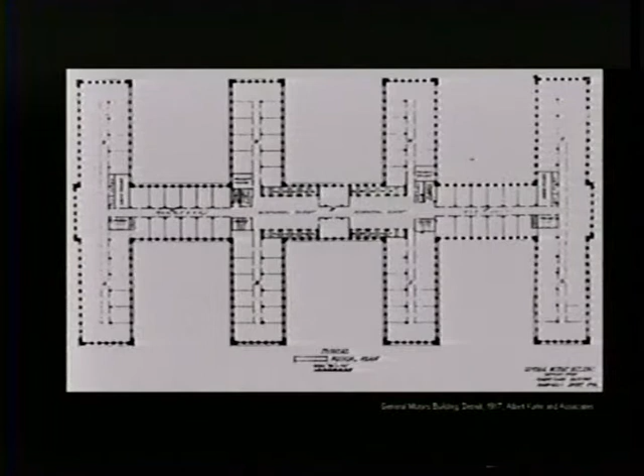You'll notice that there's also a relationship between the distance of these bars that has to be maintained, lest the daylight distribution in the lower parts of this building section be interrupted and those spaces not be functional. And then in the deep section, this is a plan of the ground floor. We know that this is deep, and the challenge with a deep floor plate like this is you can't bring in light from the perimeter to effectively illuminate that space.

So in that space between the office bars, what do we have? We have a set of skylights that essentially illuminate the back of this showroom to supplement the light from the perimeter. It's not rocket science, but it's a very thoughtful integration of building form and light.

And secondarily, these skylights, by illuminating the back of this section, allow for a nice transparency through this. Otherwise, you'd be in a very bright exterior looking into a very dark interior, and that window would have been reflective. But with the addition of the skylights, you can see those products highlighted in that space beyond you. So this is very functionally about lighting design and the way you experience space.

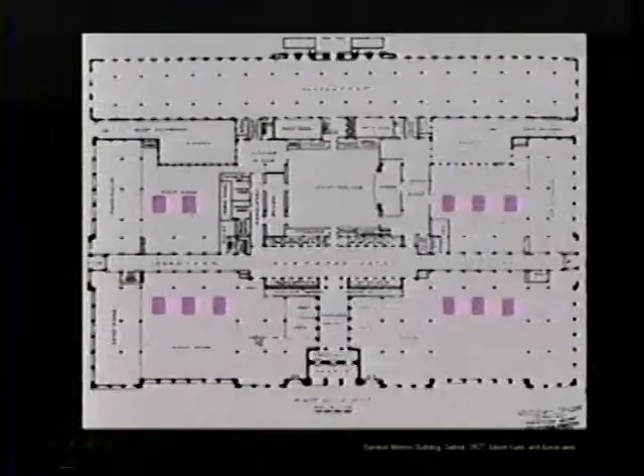Secondly, the way that this building was programmed looked at the relationship between the needs of each one of these program elements and the distribution of daylight into the space. The offices are important, the showroom is important, these shops are important. But this entry lobby and elevator area, not so important, because what the architect wants you to do is enter this space and have your eyes adjust to low interior light levels. And then when you get to your destination, it feels bright, rather than going into a space that's immediately darker than what you exited.

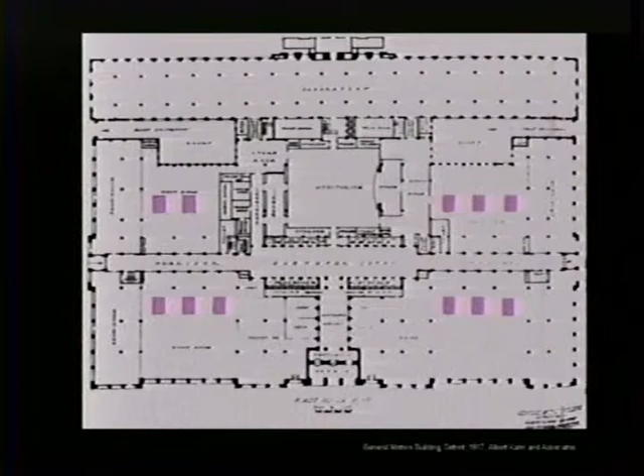And ultimately, the auditorium, which is probably the space that needs the highest level of luminous control, because they're using spotlights, doing theatrical stuff, is buried in the center of the building. They don't want daylight in there. It's not going to fit with their programmatic needs. So this is a simple building, but it's very elegant and thoughtful in terms of the way that it addresses light. And this was basic competence for architects up until about 1945-50. And it was so key that architects really took this stuff seriously.

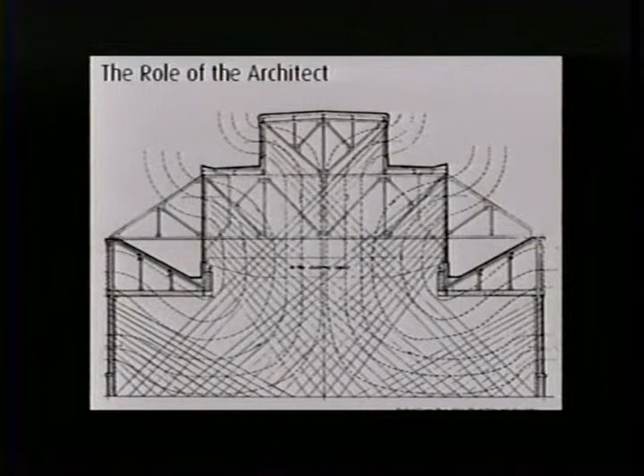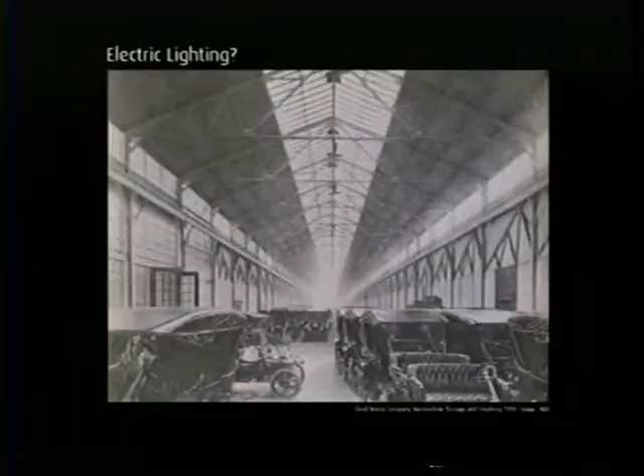This is a finishing shop, so they wanted to be able to see the light modeled around these vehicles on all sides so that they could effectively do their work. And not only did it have to function on its own, it had to function across a really broad cross-section of the day. Because if there wasn't enough light in here, these guys couldn't work, their product would be substandard, and it was really, really taken seriously.

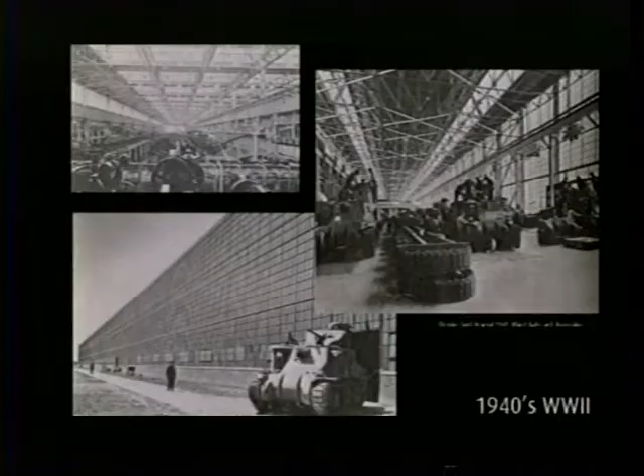And what really happened was that the relationship between how architects designed their spaces really lost connection with light in space. And that work became the purview of lighting designers and engineers. And those things sort of went their separate ways. And I think only now they're starting to work their way back through integrated design, kind of like the things that are being promoted here in Kevin's lab.

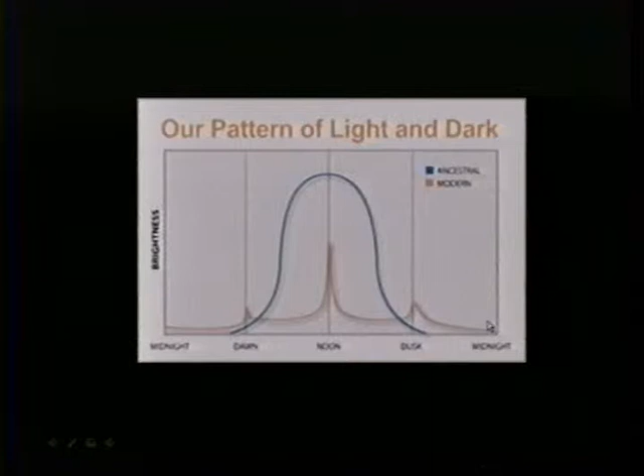And we might get up, head out to the car or the bus stop, catch the bus, drive into work, get a little dose, and then we sit at about 50 foot candles in our offices, or 30 or whatever it is. And then ramp up for our little trip to lunch, back in the office, 30 foot candles, and then back home to our sort of low light level interior environments. And that's very, very different than what we were built for.

And not only do we sort of not get the brightness, we don't really get the darkness either. We have the ability to illuminate everything all the time, and we sort of do that for a lot of reasons. But anybody who's flown into a city at night just knows it doesn't seem right to light everything, especially when no one's there. But we do it anyway.

We also know that Americans spend 90% of their time indoors and tend to work more hours than any other industrial nation. And that light regulates our brain chemistry, serotonin, melatonin, based on not just exposure to light, but just seeing brightness. Seeing that brightness tells our brain it's time to wake up. And as architects, it's key that we address that.

The circadian rhythm is sort of how our body responds to the 24-hour cycle of lightness and darkness. And also the color spectrum, sort of the dynamic chromaticity of the sky, or the way it changes color, the way it's blue during the day and much warmer in the evening. And the disruption of that cycle can lead to all kinds of problems. Seasonal affective disorder, breast cancer, Alzheimer's.

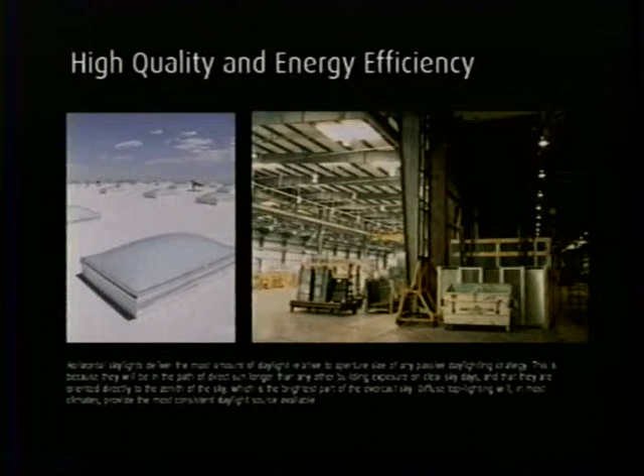The other thing we know is that by design, architecture creates pollution through using lots and lots of energy. And daylight can help reduce energy usage in buildings if it's done right. But it also has another quality that I think is nice compared to a lot of other types of energy efficiency strategies. Not only does it have the potential for creating a more energy efficient built environment, but it can do that at the same time you actually deliver a much higher quality space. I think that's unique in daylighting. But in some ways, it's sort of like trying to have our cake and eat it too.

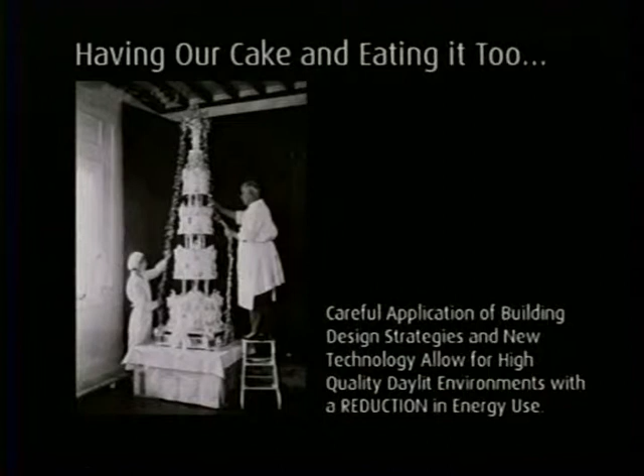Though with the new technology we have in windows, in envelope design, in blinds and shades and exterior sun control, we can deliver daylit environments that are actually more energy efficient than buildings that are not well daylit. So how do we do that? Well, it's through sort of a simple line of thinking around creating small loads in buildings. And step one, in my opinion, I'm the daylighting guy, so I'm going to say this, of course, is to use daylight as the primary source of illumination in buildings whenever you can. And that's for most buildings. Optimizing the building orientation, shading the building skin. Don't overglaze.

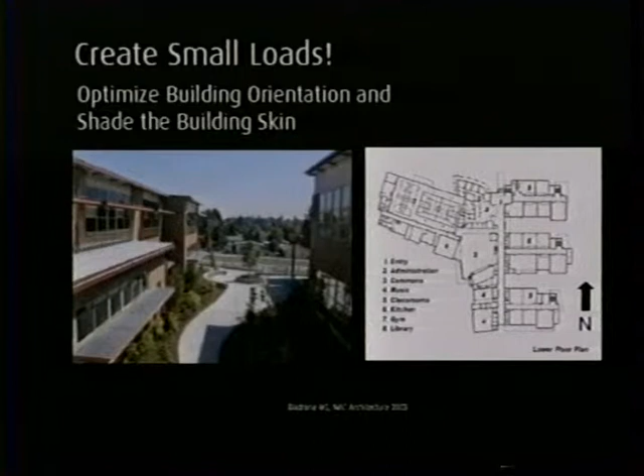So how do we do that? Well, we need to understand what our source is. If we're going to design a building that responds to the sky as a light source, we need to understand what that light source is. And to make it simple, since the sky is so dynamic, changes color, the sun's in a different place, the weather changes, sites are different, we break it up into two simple categories. One is the overcast sky and one is the direct sun.

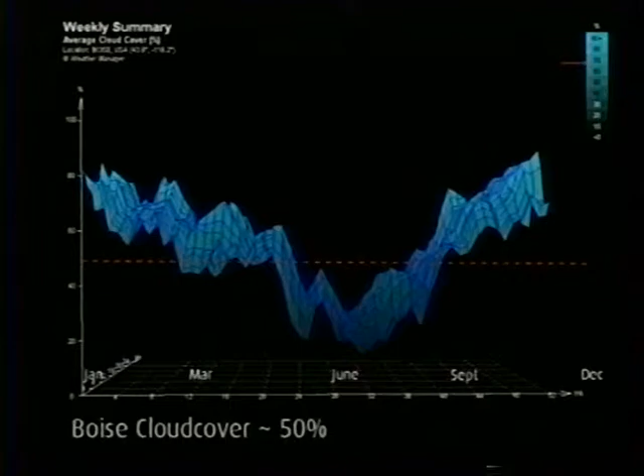Logically? In climates where it's the opposite, those are ideal passive solar climates, where it's overcast in the summer due to thunderstorms or some other reason, and it's really sunny in the winter, so you can take advantage of that thermal load. Anyway, in Boise, you have an ideal climate for daylighting, and a much brighter resource than we do here in Seattle. So how do you daylight? Pardon? Oh, I thought there was a question.

And as it's been in the past, it shall be in the future. The sky hasn't changed much. A thin building plan where you're out at the perimeter gives you access to daylight as a resource from the side. And then if you've got a big and deep building, bring in light from above. It's not rocket science.

Daylighting in the direct sun, however, kind of is. It's really hard. It's complex. We've got essentially a point source, the sun. And not only do we have a very harsh point source, you can see in direct sun we have 15,000 foot candles. Out here you probably have closer to 20 in the summer. In shadow, that can be as low as 500. So the blue sky is actually really quite dark as a light resource.

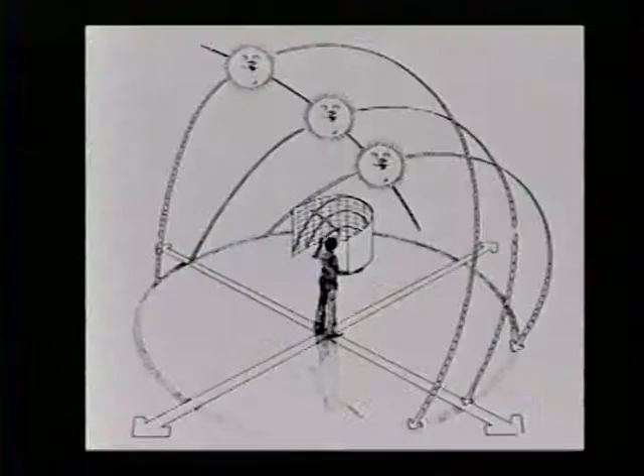So how do we deal with that level of dynamism with something like a building, which is generally a fixed object? Well, it's tough. And the way we start to do that is to look for patterns in the sun's position in the sky. Does this diagram make sense to everybody? I'm sure you guys have all seen these thousands of times.

Tell me to pick up the pace if I'm getting boring.

But what we see is we've got this low angle sun in the east, we've got this low angle sun in the west, we've got almost no sun in the north, and then the sun is in a pretty static position in the sky on the south side. So what we know is that east and west are difficult every day. North is really not that difficult, but we've got low illumination levels because we don't have a lot of sun there. And south is something fairly controllable, though we might have some seasonal problems with low angle sun based on your latitude.

Look at this diagram this guy's holding here. I'm going to jump forward. See if I can get this to work. The other thing is, we can look at diagrams all day and figure out this is the sun, this is what it's doing. Let's keep our fingers crossed for technical effectiveness.

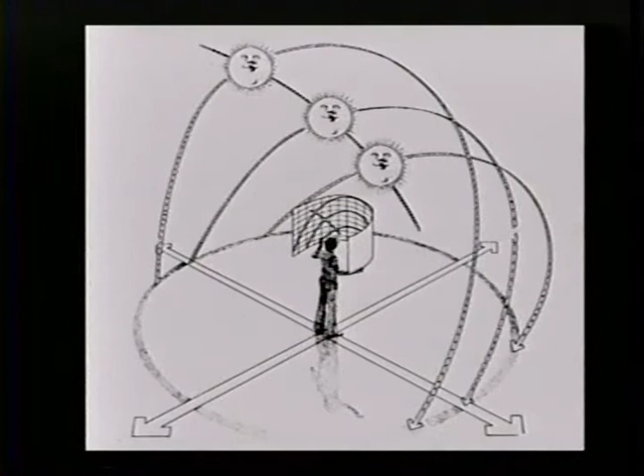And a lot of times when they get conflated together, it results in buildings that don't perform very well because people don't take into account the fact that during all occupied hours you need to control glare, whereas only during seasonal overheating do you need to control direct sunlight for thermal.

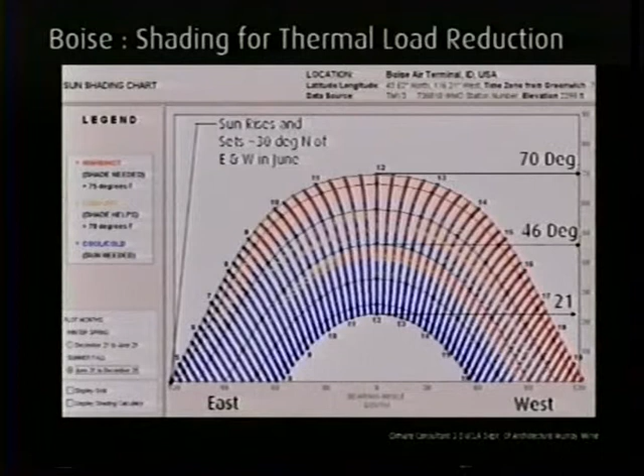That seems to be something that doesn't succeed frequently in buildings that I've been involved in. You know, whenever you talk about daylighting in the direct sun, I always reach for Aalto. It's easy. He's a master. It's just there for the taking.

And I always like to remind people through that video that trying to daylight, trying to provide a functional diffuse illumination with direct sun is like trying to drink from a fire hose. It's not easy because the sun is so intense. But Aalto does a really good job of finding a way to take direct sunlight and turn it into something that we can use as a functional interior illumination source. And he does that by designing the building as a light fixture.

The first thing he does is he stretches out his building long in the east-west direction because we know we've got that low-angle sun first thing in the morning, low-angle sun in the afternoon. And by making his building long and thin, it makes it shallow, it makes it exposed to the north where we don't have glare problems, and exposed to the south where we can control that sunlight.

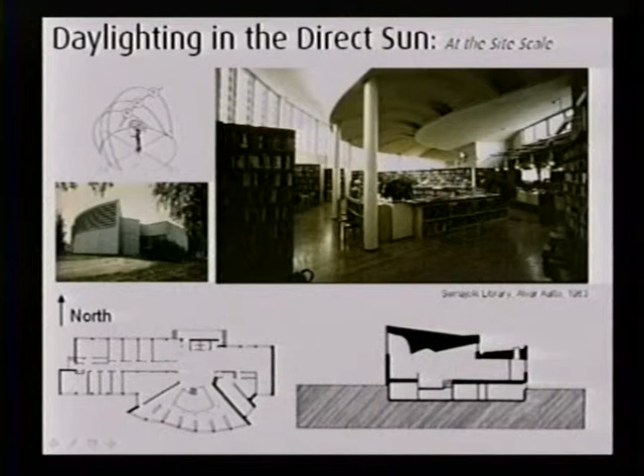And if that happens, and this space is quite dark, and we've got daylight level illumination out here, the rest of the space is going to feel very dark, and it's going to feel contrasty. So what Aalto does is he sort of punches a little hole on the north side to bring in balancing illumination. And not only does he do that, he directly engages it with this surface here, which is deliberately shaped to sort of accept that light and provide a surface for it to be revealed on.

And the relationship between these apertures and the surfaces is extremely sophisticated, so that the distribution of light is always balanced, always sort of connected with the task and the way that people perceive this space. So that's all I have to say about direct sunlight. All I have to do is go to Aalto and it's sort of done.

We've got a real big problem in terms of designing for daylight. We've spent the last 85 years with our lighting criteria being essentially only concerned with electric lighting. And there's books and books and books of reference manuals that tell us how to do that. What do we have for daylighting? Well, we have one 3-page leaflet in the LEED handbook. Certainly there's textbooks out there, but in terms of widely recognized performance metrics, all we have is that.

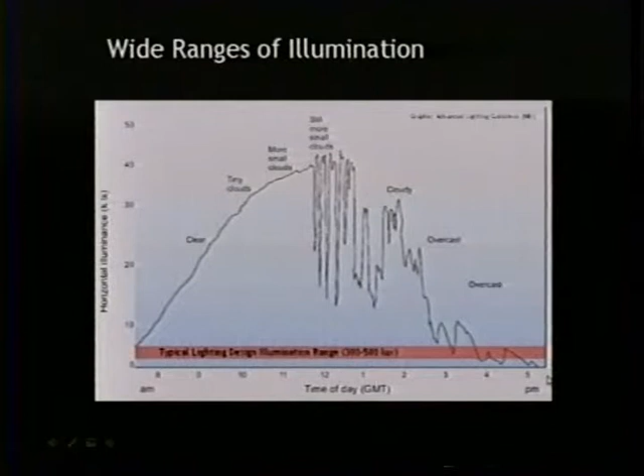And it's tough because all of those lighting metrics are designed around a static lighting condition, generally between 30 and 50 foot candles, or 300 and 500 lux. But our daylighting resource is extremely dynamic. You know, it's all over the place, really high, really low. So how do we deal with that? Well, it's tough. It's not easy. I don't have any answers, so there you have it. We're working on it. But what's very clear is that what we've got for criteria now is not adequate.

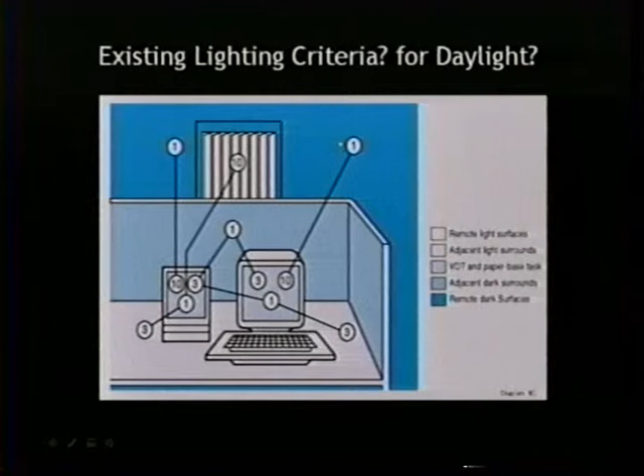We see that based on the IES, or the Illuminating Engineering Society's recommendations for visual comfort, we've got a maximum 1:10 contrast ratio in this workstation. But here's my workstation, and my space has a window. This is my old desk. This was on an overcast sky day in Seattle, and you'll have to take my word for it that it was entirely comfortable. It was just fine.

This is measured in candela per meter squared, or surface brightness. And you see 50 candela per meter squared at my desk, almost 20 down here. You know, this task lamp is a little bright. Outside in the sky, this is on the overcast sky, we have about 3,500. And that's a contrast ratio of 180 to 1. And anywhere you have windows, you're going to see contrast ratios in that range.

It's just a fact of life, and it's something we've ignored, so we don't really know what the actual threshold is for visual comfort. And my guess, I'm just guessing here, is that there aren't any absolute numbers associated with visual comfort. It's going to be context-based. So when we look at LEED as a metric, it's our primary design metric these days.

Its goal is to essentially provide building occupants a connection between the indoor spaces and the outdoors through the introduction of daylight and views in the regularly occupied spaces of the building. I think that's a really laudable goal. It's a good idea, and it's rightly placed in the indoor environmental quality portion of LEED, because that is, I think, the most important reason for using daylight, not energy. And frankly, if you get the daylighting right, your energy credits will accrue based on that performance. But the ways that it asks us to comply with their credit are frankly lacking.

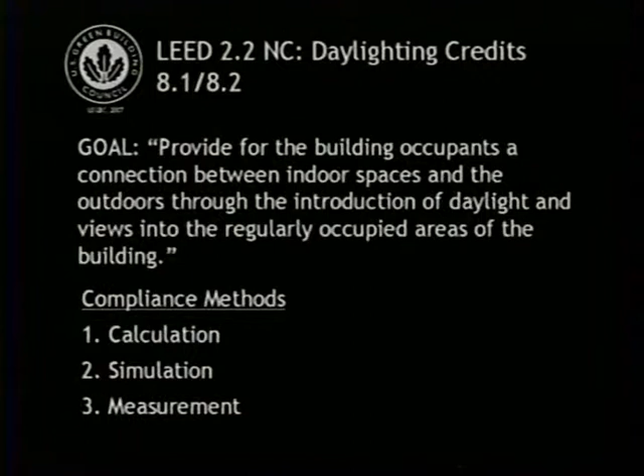We've got the calculation method, which, has anybody done LEED compliance for daylighting before? So everybody has probably done this one. This is the one I recommend people to do because it's the easiest, especially if you're already doing a reasonable analysis. And this is just a simple window to wall ratio that tells you when you've achieved a reasonable window to wall ratio for daylight performance.

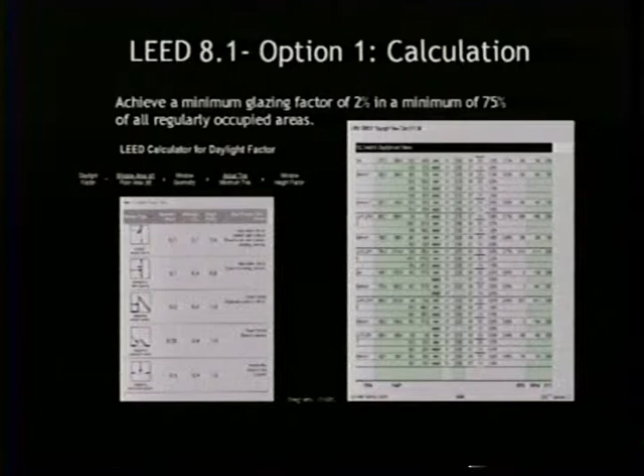The challenge with that is that the window to wall ratio that achieves a good quality daylit space according to this option is the same in Nome as it is in Miami or Arizona or New York or here. And we know that those climates really require different architectural strategies. So it attempts to be a one-size-fits-all. It's based on the overcast sky, so it doesn't make a lot of sense.

The second option is to do a simulation at noon on a sunny day and achieve more than 25 foot candles on a horizontal surface. But I find that a little problematic too, because one, what's magic about 25 foot candles? And two, what if you have 10,000 foot candles? You comply with the credit. It's just fine.

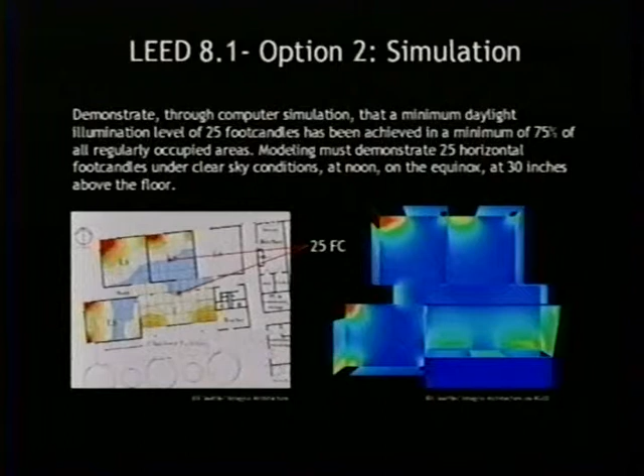And what if you're just sort of on the edge on the east and west? We know there's not a lot of illumination on the east and west at noon on the equinox because the sun is directly out of the south and you're going to be in shadow. So maybe do you bump those up unnecessarily to the detriment of the project to meet the credit? I would hope not. I certainly would hope the credit wouldn't drive anyone to do that, but stranger things have happened.

The third one, I like the intent of it. I think it's really important. It says after you build a building you go out and measure and see how it's performing. So it tells you you can go out and on a 10-foot grid, measure all your regularly occupied spaces and achieve 25 foot candles. So to me, it's sort of the wing and a prayer method. But it doesn't say anything about the time of day you go out there, or the time of year, or any of that.

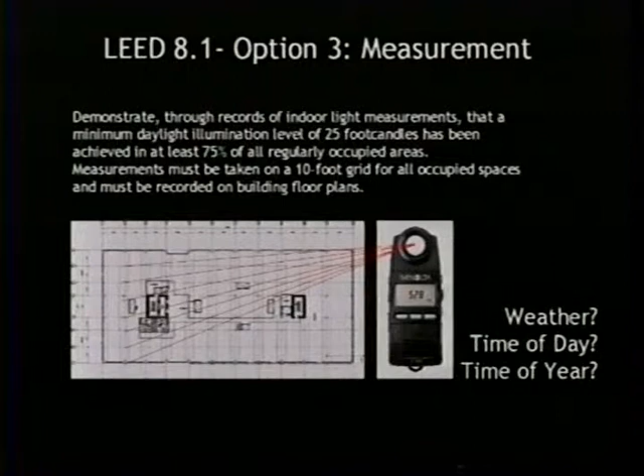So if you have a building that you're not entirely confident is going to perform per the credit, what I would do is get your light meter and pack a lunch and find a sunny day in the winter and go out and start with the east side. And you'll get your 25 foot candles pretty much everywhere. And then around noon, maybe make your way over to the south. And then late in the day, move around to the west side and sort of follow that illumination. I bet you can get there. Again, there's no distinction for what's too much, what's too little.

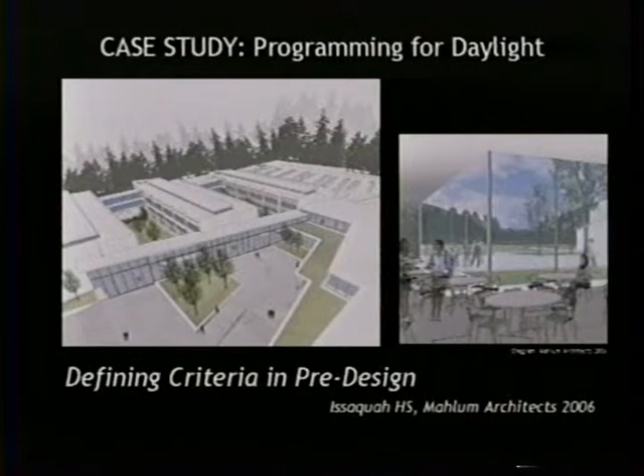But the one thing that I like most about the LEED credit, and I think this is probably its most important function, is it forces you as a designer to sit down with the brief and decide what spaces are important for critical visual tasks and where daylight is important. And in my experience, the most effective projects have been the ones where, prior to organizing the building on the site, lighting and daylighting and energy were part of the building program and had an influence on the building organization.

And I think it's important for all of you, when you're designing a building brand new, to go through and look. If you want the daylighting to be good, go space by space and identify, are views important? Is daylight even important in these spaces? How often is it occupied? And what time of day and what time of year is it going to be occupied?

And for those spaces that are going to be daylit, ask these questions. What are the minimum requirements? Is glare control important? Are there maximum light requirements? What might be a good solar orientation based on the time of occupancy? And what daylighting strategies in particular might be most appropriate?

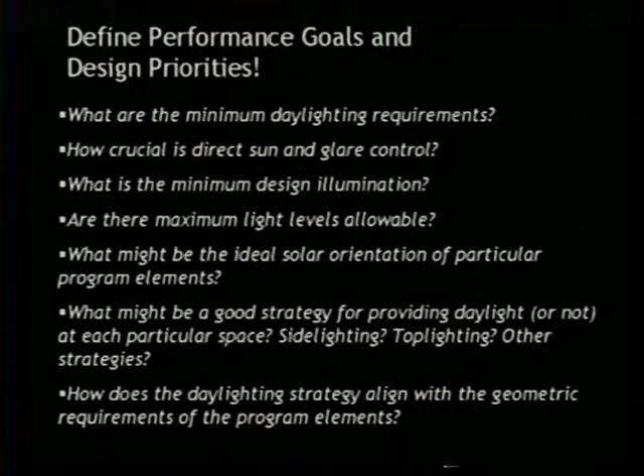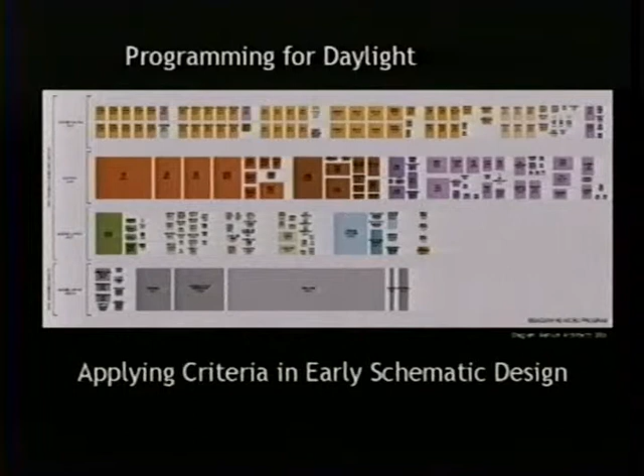And I like doing that in conjunction with a program like this that starts to show a little bit about what the aspect ratio and sectional geometry of the spaces are going to be. Because rather than just knowing gross square footage numbers, here you start to know a little bit about what the geometry of these spaces is and how the daylight might effectively be delivered.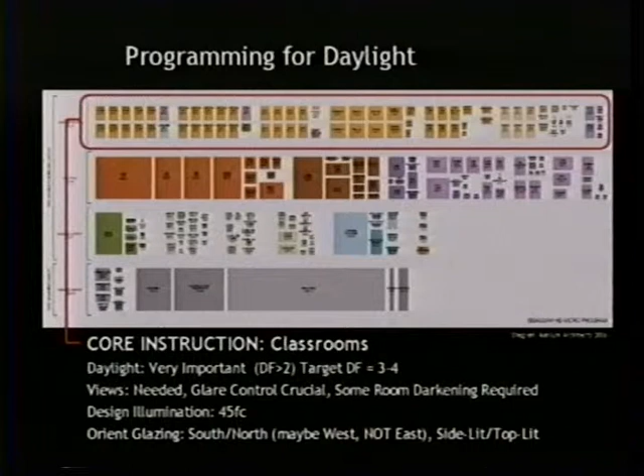In this case, and this is a very simplified version of what we did, we looked at, say, the classrooms, and we know that these are sort of 30 by 30 spaces, and that generally, if they're deeper than 24 feet, we can't really effectively light them from one side. We have to light them from two sides. We also know that glare control and views are really important because of research that tells us that views are important in classrooms and because of what we know about glare and direct sunlight.

The other thing we know is that schools operate from about 7 in the morning till about 2 in the afternoon, maybe 2:30, maybe 3 at the latest. So an east-facing classroom is going to be subject to very low-angle sunlight every day, first thing, and the teachers are going to close the blinds and they're going to stay down forever.

But we also know that the west side maybe isn't that big of a deal because we can shade it and probably control direct sun easily until 3 o'clock. And if there's glare and maybe a little overheating, is it really a big deal if no one's there to experience it? So there are opportunities for site planning this thing.

We know that the classrooms need to sort of be north, south, or maybe west, but certainly not east. And that it would be nice if they're not shallow, that they're also on the top floor. The gym is sort of a different story. It's lit from above. We know that we can't really effectively light a gym from the side without overglazing the heck out of it and making it subject to lots and lots of direct sun that's going to be glary.

So ideally, that gym really wants to be directly under a roof so that we can light it diffusely from overhead. And in reality, my experience shows that having windows or substantial amounts of window area just leads to lots of glare, and that most gyms with windows have the blinds pulled all the time. And that opens some opportunities.

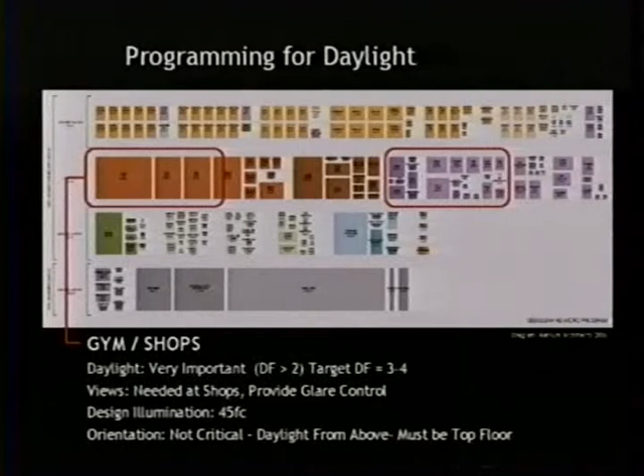Yeah, it needs to be on the top floor, but in our worst case scenario, if we don't have a lot of windows, we can orient this thing east, west. We can put it in our worst location for sun angles because we're not going to be using glazing on the side. So the orientation of that thing really doesn't matter as long as it's got access to the roof. And the same could be said for some of these shops. They're getting big enough that we can't really effectively light them from the side.

The theater, just like that historic example that I showed in the beginning, we don't want daylight in there. And setting priorities and identifying where daylight isn't important is just as illuminating and helpful in basic building planning as knowing where we want it, because it allows us to have priorities. Because if everything's a priority, you all know nothing is a priority.

And then our circulation. It's not a critical visual task area, but sure, it'd be nice to have daylight in the space. So what we know is, let's orient it any direction we really want. Put some glass in there, make it nice, but we don't have to care if it's west facing or east facing. A little sun in there will animate it. It'll be cool. It'll be dynamic. And you know, you don't need a lot of glare control. So those can sort of fit in anywhere.

And that exercise, even as simple as this, has been the difference in my experience between projects that are an easy coast downhill to success and an uphill, painful slog to mediocrity. It's just been my experience. So how do we deliver daylight? Well, predominantly through two design strategies, top lighting and side lighting.

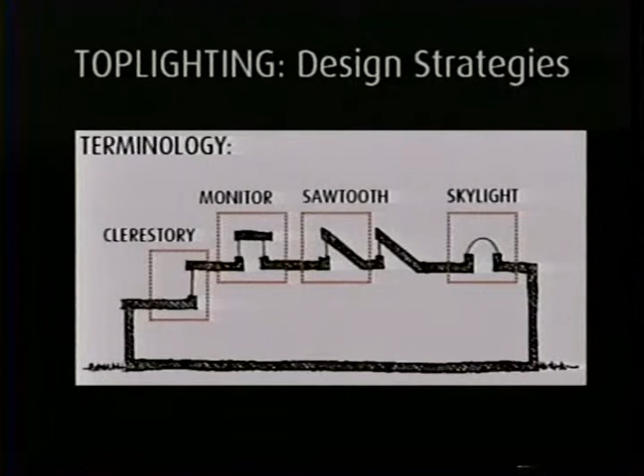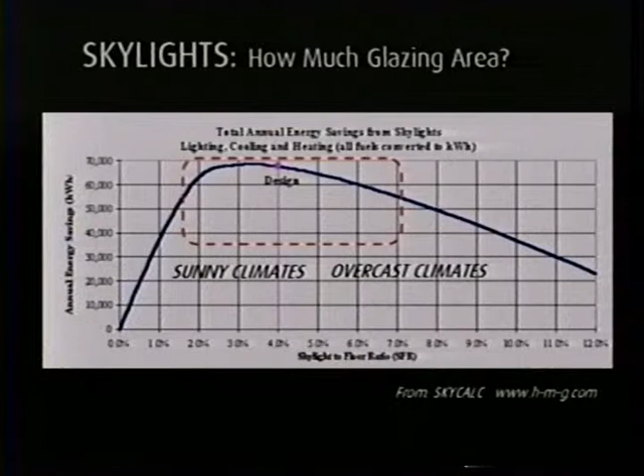And top lighting, just like the overcast sky, it's easy. Skylights, high interior reflectances, bounce that light around. How do we know how much? Well, there's tools online like SkyCalc. There's sort of local lore that you guys probably know of how to do skylighting. It's very, very simple.

The only design guidance that I have is generally I like the skylight spacing to be roughly equivalent to the floor to ceiling height, and I like about half that distance at the perimeter, because I know that if you light the walls, light the architecture, you get the perception of brightness. If you light the floor, you don't. So you like to get that light on the vertical surfaces.

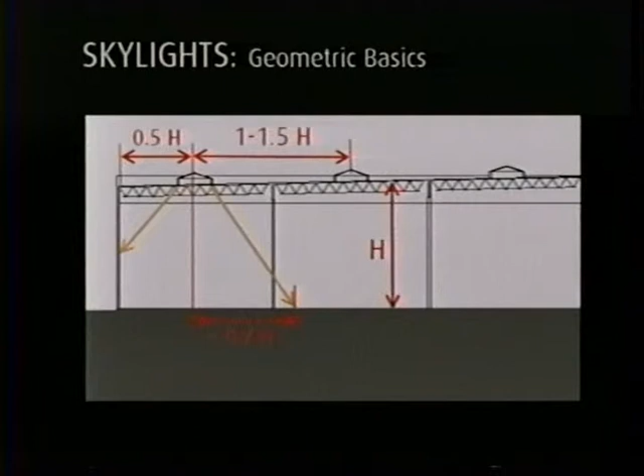The other thing that is absolutely key is maintaining effective light diffusion. This is for a project I did for Boeing. The bottom of the truss is 100 feet here. This is enormous. So here we've got direct sun just tracking through this thing. Looks like Studio 54 in there. 6, 7,

8, 9. And though it's dramatic, and though it's kind of cool to look at, it doesn't fit the visual tasks that are happening in here. So yeah, it's cool, but the light's all over the place. The distribution changes. We got line of sight to the disk of the sun, and we've got glare. They've also got offices built in this giant truss. These are each a one-story office in here. And this skylight sort of drives direct sun and glare into those offices.

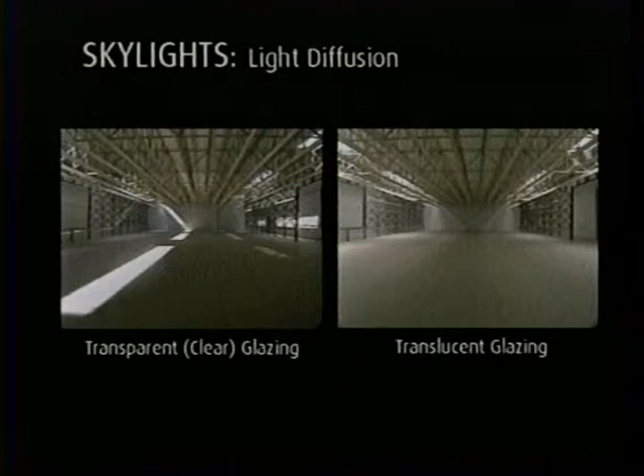Well, through just changing the materiality of that skylight to something light diffusing, we get an entirely different pattern of light distribution in the space. The only difference here is diffusion. And it sort of ramps up, gives us a good distribution, and ramps back down. So it adds some dynamism, it gives some better color rendering, and it provides the kind of light diffusion that we need for putting wires together and riveting together aircraft.

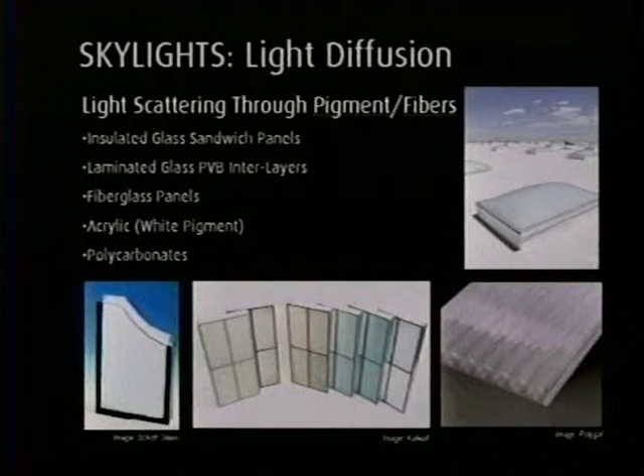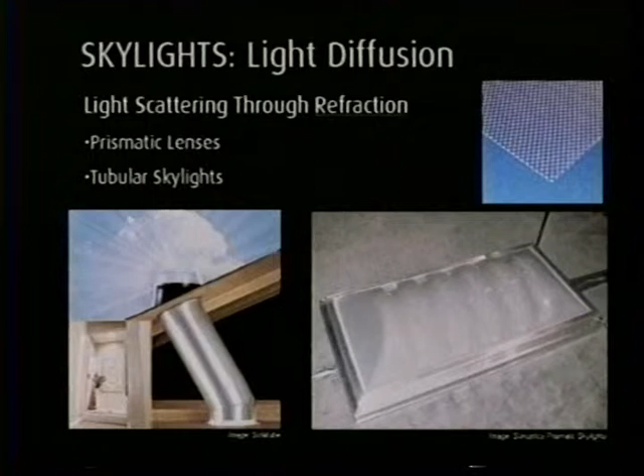So how do we get that? We all know this stuff through pigment, fibers, scattering, Kalwall, etc., acrylics. We can also get diffusion through refraction, the prismatics. I'm not going to go into the physics of light here. And then through reflection, just bringing direct sun onto surfaces and allowing that to diffuse through the space.

I have until 6, right? Is that right? Do you guys need a break? You guys want to take a break? Questions, comments? Okay.

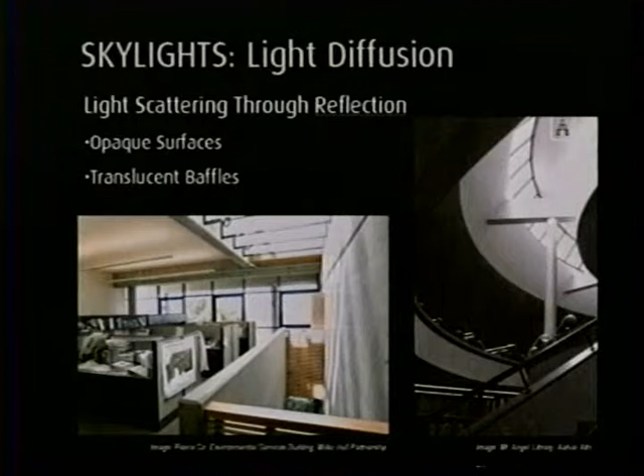Side lighting is really a much more dramatic challenge. It's sort of stuck with these immutable laws that you just never can get beyond. And that is that you generally get a distribution about twice the head height of the window. And that holds fast. And as soon as you get anything that vertically projects into the space, you get deep shadowing. And that's a challenge when you're trying to fit out a space.

And the other thing is that this is sort of the best case scenario potential. When the users come in and start changing the blinds, adjusting the glare, and putting their stuff in there, that's a whole different story. So it's very unpredictable. When you're lighting from above and you've got diffuse skylights, that happens independent of people's interaction. Side lighting, you need to either be clairvoyant to your user activity, or you've got to plan for your worst case scenario contingency.

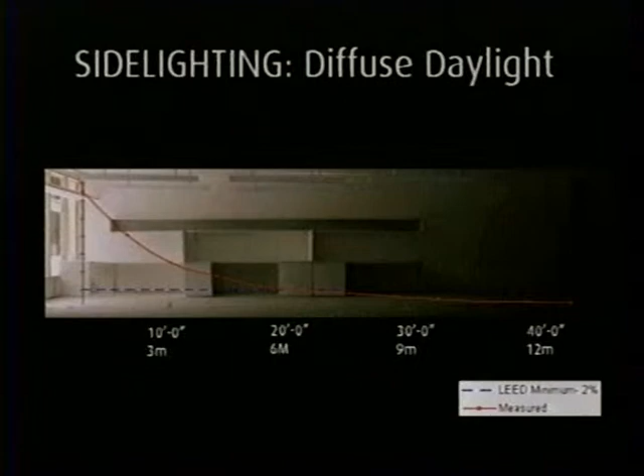And really to have effective side lighting in spaces that are this deep, essentially beyond 25 or 30 feet, you really need a secondary source. It's just immutable law of physics. It's unforgiving. And I made this 40 feet because of something that I'm sure you all are aware of. When you're working with developers, what's the magic number of that lease span? Sort of 40 feet. Everybody needs to hit that because that's the economics. It's tough. I don't have easy answers.

One of the reasons that side lighting is so challenging is because it's intertwined with our desire to have views to the exterior. And we all love views to the exterior, but when we're bringing in light at the same time through that same aperture, the sun might have something to say about that. Delivering light and providing views are both effective from side lighting, but not at the same time. They can be at cross purposes quite a bit.

And the other thing that's absolutely key in designing with side lighting is, frankly and oddly at first blush, the position of the back wall. Because as this back wall starts to drift away, you start to get this cave effect. I show this because this is the edge of the proportion where you can side light a space and have nice balanced illumination from the perimeter to the interior. As this wall starts moving back 3, 4, 5, 10 more feet, you lose the surface brightness on this wall. It starts to get dark, or it starts to have shadows on the top of it. And the perimeter to interior relationship starts to get contrasty, and we know that that creates glare.

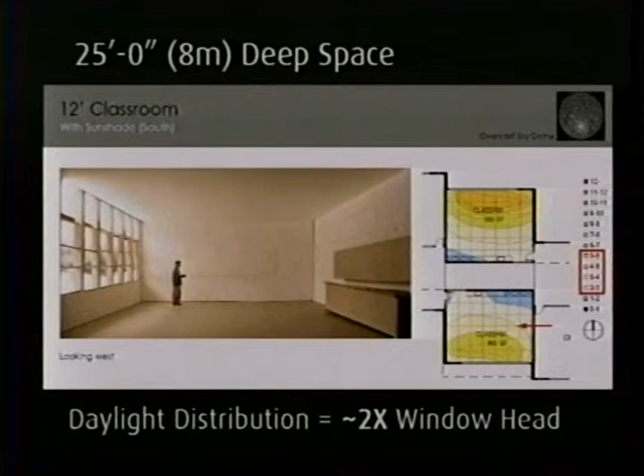And one of the biggest problems with side lighting in my efforts has been, well, we've got a 34 or 32 foot deep space, and we're going to try to light it from the side by throwing light shelves and huge amounts of glass out at the perimeter to drive that light deep into the space. And I've heard a lot of architects use that as their reason for doing all glass facades.

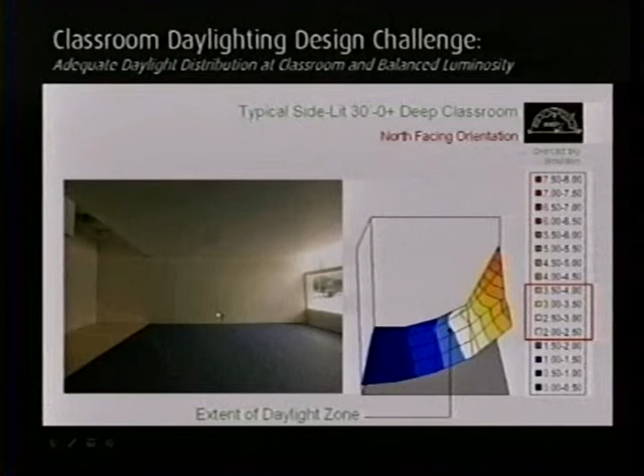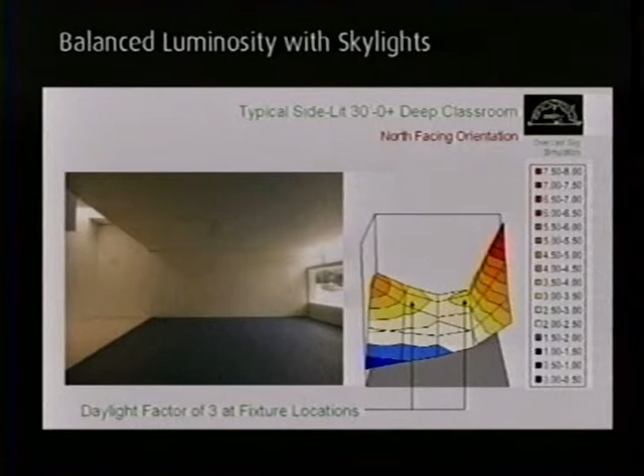But the problem is, in trying to deliver light deep into the space from the perimeter, all you do is end up overlighting this space, opening this perimeter zone to more glare, and increasing the likelihood that the occupants are going to close those blinds. So it doesn't really pay to overlight this zone in a pretty futile attempt to get light into the back of the space. The only way to really make that happen effectively is with a second source of some sort, either from the top or from the other side, and that's tricky.

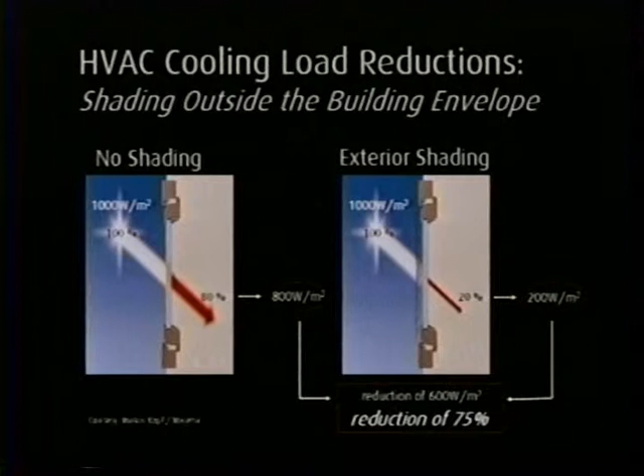So how do we deal with that as best as we can? Well, going from the outside to the inside, you heard at the beginning, or 15 minutes in, I showed that diagram with the sun and its position relative to outdoor air temperature. That can guide us in making decisions about how we want to shade. Because if you shade on the outside, obviously, you're going to have much lower thermal loads on the interior. And that's going to be much more effective. And this just shows the difference between shading with some exterior Venetian blinds versus no shading at all. And it's substantial reductions of IR, infrared radiation.

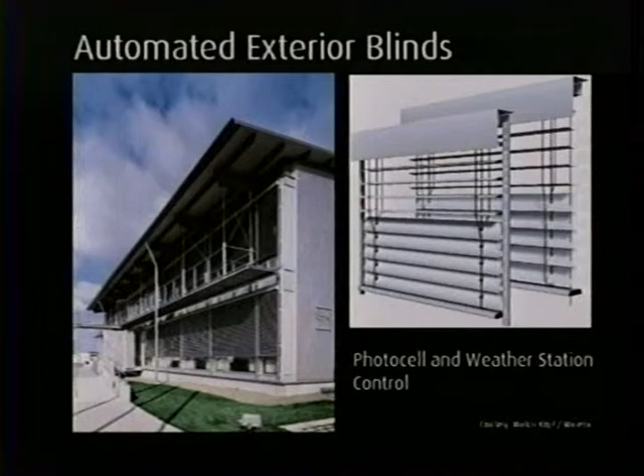So in some respects, automated exterior louver blinds are sort of the magic bullet, because they shade the sun when it's there, they can automatically adjust to the tilt angle, and then when the sun is gone from that facade, they go away and allow the maximum diffusion of light into that space. Or when it's overcast, they allow the maximum diffusion of light into that space. And the sun's not a mystery. We know where it's going to be, so these can be programmed based on an astronomical time clock and only controlled based on the presence or absence of the overcast.

Secondly, we can do fixed exterior architectural shading and design that to shade the window around the time period when the building is likely to be in cooling mode. And that's pretty simple in our climate. I mean, you get about a 1-to-1 relationship between the shade and the glazing beneath it facing south, and you'll get pretty much complete sun control from March 21st through the summer to September 21st, and that can be pretty effective.

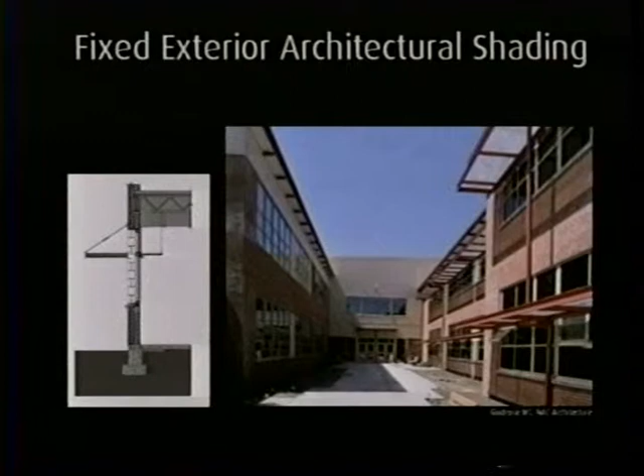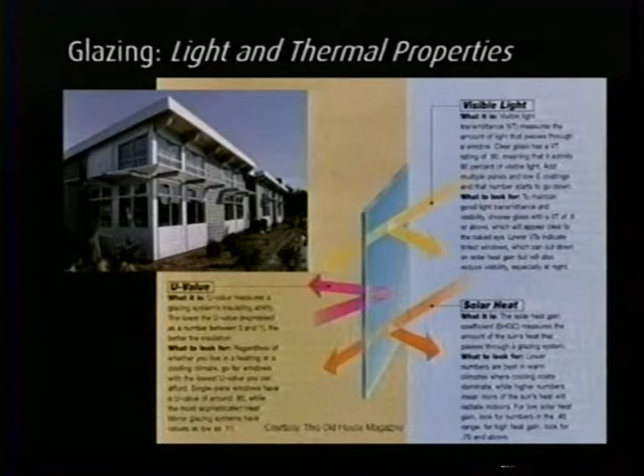In the glass layer, we just need to understand the properties. I'm sure you're all well versed in this, so I'm not going to go in detail. Solar heat gain versus visible light versus U value. Suffice it to say that the golden property in daylighting is the LSG, or light to solar heat gain ratio, and then obviously U value is what makes your envelope tick.

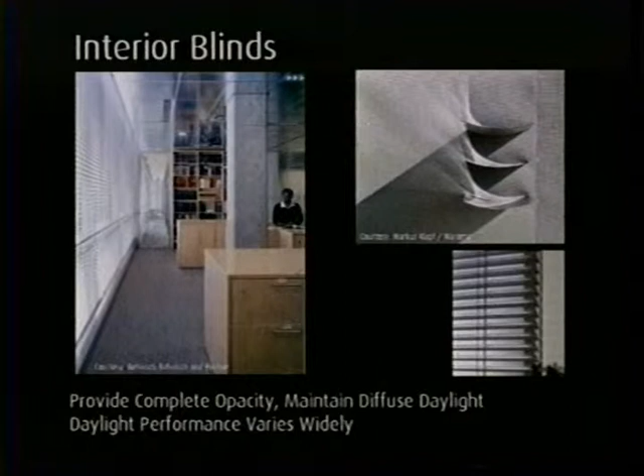These images are from Warema, a German high-tech blind manufacturer. And they make some interesting daylight optimized blinds that allow glare control without sacrificing daylight performance to a large degree. The perennial problem is that people close their blinds and then you get no benefit out of all that glass. You get no daylight benefit. So that's a sketch of the challenge and some of the potential opportunities.

I want to show you a few slides of some projects that I've worked on over the past 4 or 5 years that have gotten built. And Kevin and I, actually one of the reasons Kevin flew me out here is to do double duty, helping him photograph some buildings here in town.

And what we've been doing is finding projects that we think turned out pretty well, that the occupants and the owners think turned out pretty well, and going and looking and turning the lights off and using a process called high dynamic range photography to capture the pattern of daylight distribution in the space so that we actually understand, is it doing what we thought it was going to do? Is it effective? Is it functional? And I'm going to show you some buildings.

I showed in my slides some buildings that had some problems, and these are all projects that I think are pretty good. The first one is the Terry Avenue office building by Weber and Thompson. And this building just this week was named an AIA National Committee on the Environment Top 10 Green Buildings. So that was kind of an honor here.

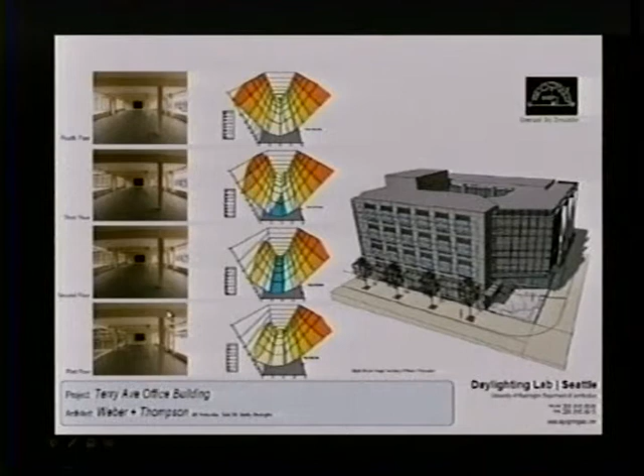And you can see here anything that's blue is below our criteria. It starts to drop below, but then at the bottom it bounces back up. The reason for that is the floor-to-floor height on that bottom floor is 16 feet because we just couldn't get enough light in from the side in the atrium to make it work on the bottom, so we had to bump the building up, and in the end it made for a better retail environment, so we had some tailwind there.

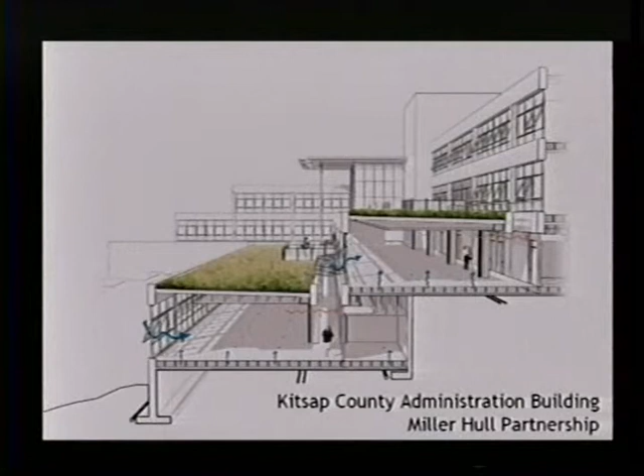To the left is north. So this building sort of goes downhill to the water to the north, and to the right is south. So here's the sort of entry. This is the little interior courtyard. Beautiful space with a view out to Sinclair Inlet, if anybody knows the area around Bremerton and Port Orchard.

Here's the upper floor office, and this is the only space that's sort of lit from two sides on the perimeter. This is at the very top of the building massing that cascades down the hill. I'm gonna go to the next slide. I like this one better. On the left here is the north. On the right is the south, and this is a south-facing clerestory. And then there's views to the outside through the council chambers offices here.

And the thing that works well about this is there's no direct sun out of the north, so these views are nice and clean, no blind control problems. And our south window has a little overhang, but it lets direct sun in the winter.

But architecturally, what they did was they space planned this sort of copy room, utility room bar adjacent to the south and put a hard lid on it so that when the sun comes in, it never penetrates deeper than the hard lid here. So it never actually gets in this space and causes glare problems. So they don't have to go up and control blinds up there, which is really nice. Again, all the electric lights are off except this sort of desk light here.

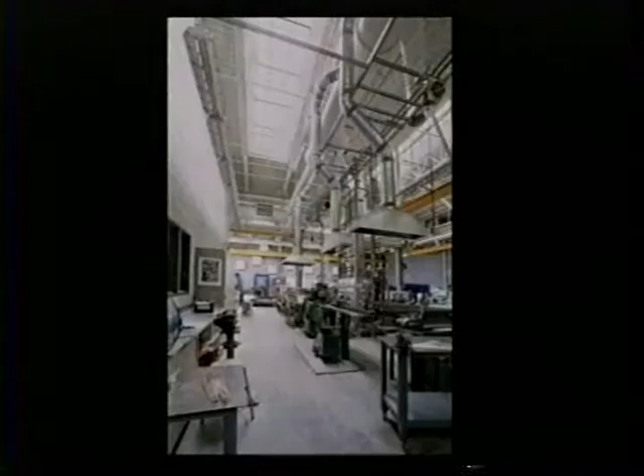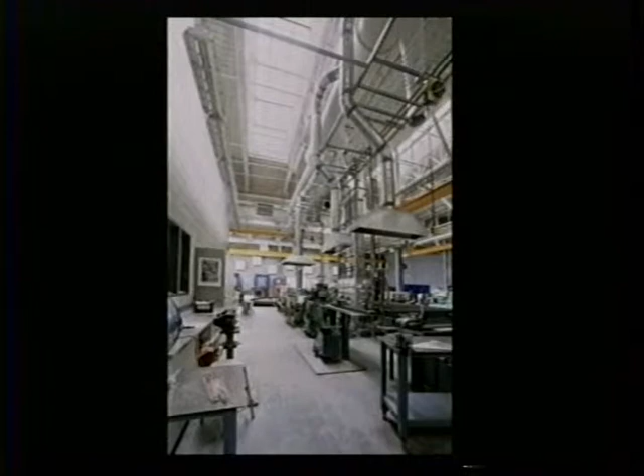Here's their welding apparatus bay, and this Kalwall skylight delivers functional light onto these benches, but it also serves to light this wall. And its relationship to the wall really creates the perception of brightness and animates what would otherwise be a dull interior box.

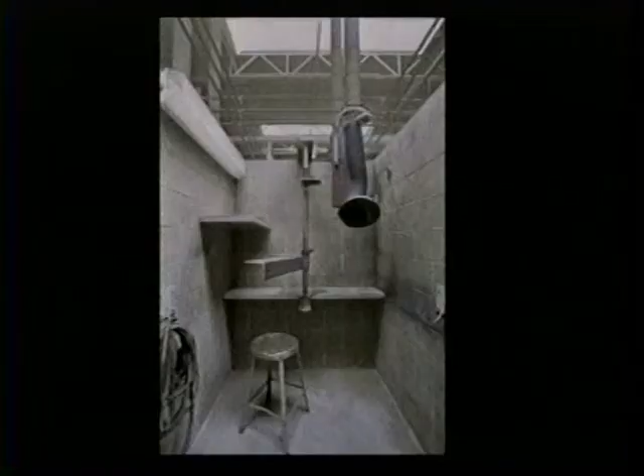And then they've got these big welding bays, where they teach students and teachers go in and weld. And they've got this upper volume that's all painted out white and these big skylights. And we looked carefully at the relationship between these welding bays and the skylights and how light distribution was going to happen. And there's no top on them. So you get this beautifully daylit space, even if it's a dark day.

But it's just simple, diffuse light placed to light the architecture. Lighting design can be simple and just drive light onto the floor, and it's not very interesting. Daylighting can be the same way, but if you place the sources of illumination thoughtfully relative to the surface, you can create amazing spaces out of what would be dull.

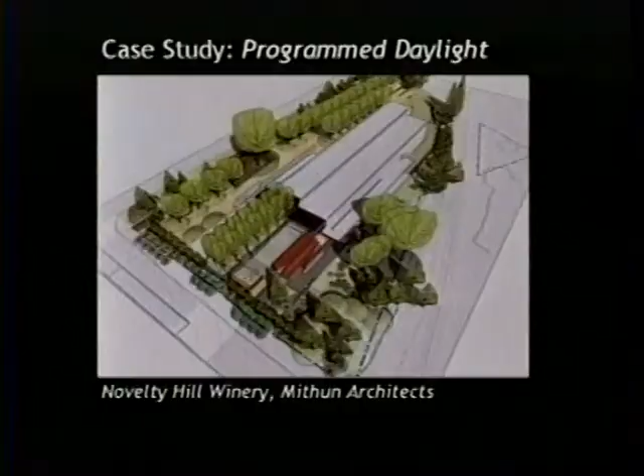And I think I'm going to end with this project here. This is a project I worked on with Mithun Architects. This is the Novelty Hill Winery. And I also collaborated with G.Z. Brown, or Charlie Brown, at the University of Oregon, who's the author of Sun, Wind, and Light, and really a legend from the 70s and beyond in passive design. He's been at this longer than I've been alive.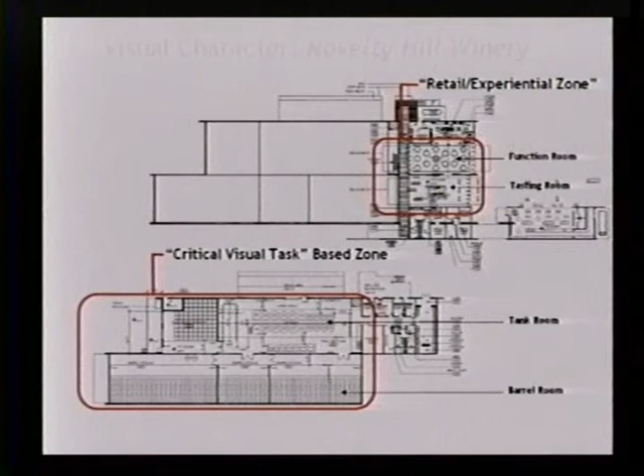And he did energy programming, and I collaborated with him and Mithun to do programmatic analysis of the daylight and the lighting needs. And it's simple, and I think it underscores the issue that daylighting, just like electric lighting and other design, isn't a one-size-fits-all activity. It's something that needs to be appropriate to what's happening in the space.

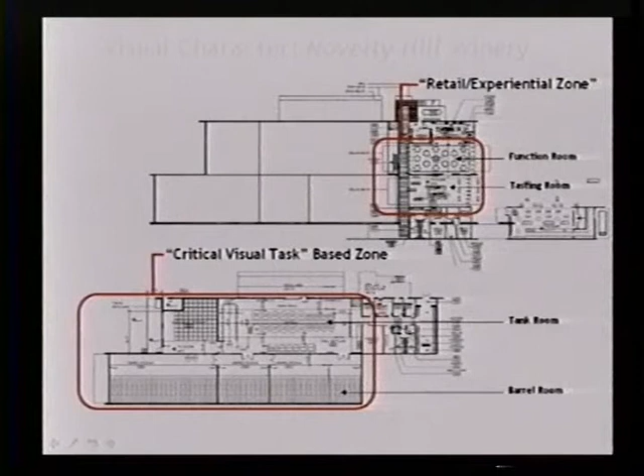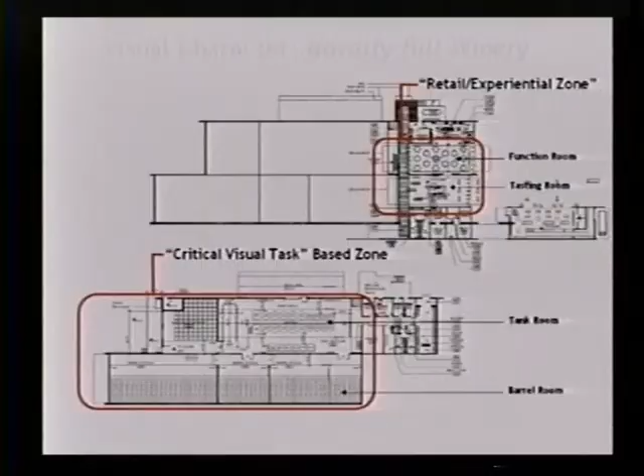And there's really two spaces. This is a space where people go and visit and taste wine and have weddings and do all sorts of things, a retail experiential place. And then there's more of a critical visual task area where they do wine making and have their studio. But the idea was to have a strong connection between the two of those through transparent glazing and other things. And we did a few things to make that happen.

But your eye is always brought through the presence of this task lighting that's always on to this transaction counter where you do your tasting, so you know the focus of the space. So as the daylight dramatically changes on the walls and changes in terms of the horizontal illumination, these decorative light fixtures provide an anchor of stability in the dynamism.

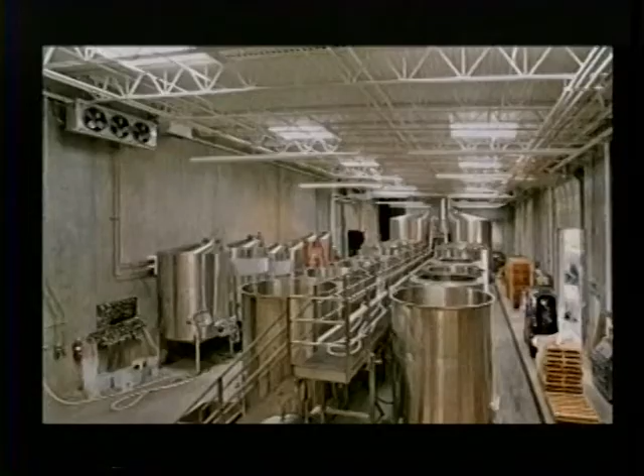But the other side of that wall is where their winemaker studio is. And we really designed this space, essentially engineered it to just deliver diffuse daylight through skylights. Put a lot of them in there, coordinated it with the FF&E build out of all these items, got some light on the walls, and made it so that there was very high quality color rendering, high levels of illumination that were appropriate to reading their gauges, working their bottling equipment, and doing all of that.

And so the point being that each one of these spaces has a different daylighting strategy, and that strategy rolls out of the function, the tasks, the goals for the space. And it's not a one-size-fits-all thing. It's really driven by a multitude of different ideas about space and light. And that's all I have to say. I'm done. Thank you all.

You had a question? They are transparent, but they shouldn't be. Yeah, I wasn't happy about that. They thought there was someone that just had to see the sky. And it's been a little bit of a problem, because sometimes when there's direct sun, you get sunlight on a temperature gauge, and it cranks it up to about 170 degrees, and they're bottling. Their tank room needs to be a highly controlled condition. So I'm not sure if they've gone in and fixed that yet, but it's been talked about.